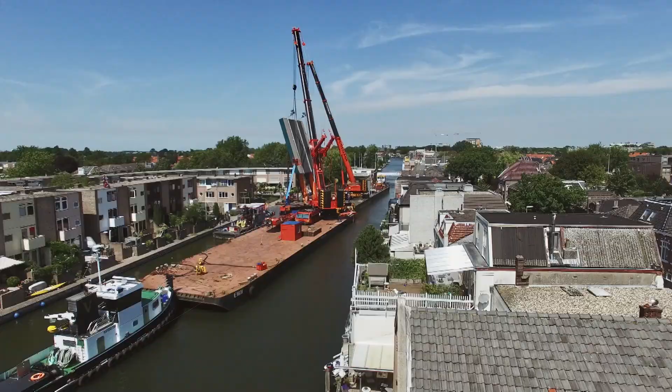In the Netherlands, a construction crane calamity. I heard metal to metal. It was definitely shocking. A potentially fatal flaw strikes an iconic San Francisco bridge. If any one structural component fails, the entire bridge can go down.

In Louisiana, mystery as a massive whirlpool drains a lake. It's the site of one of the greatest engineering catastrophes in this country. And tragedy strikes a Florida beachside condo. I was coming out and saw the condominium physically collapse right in front of me.

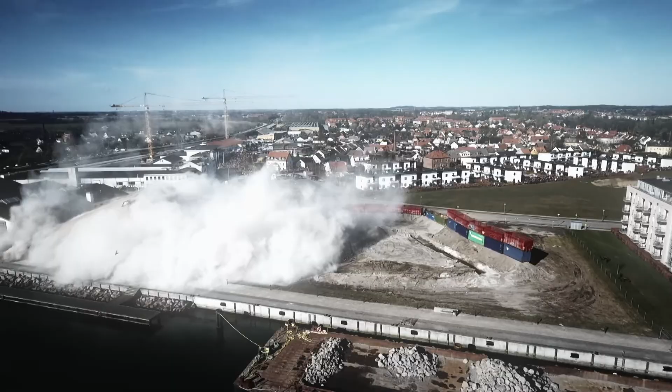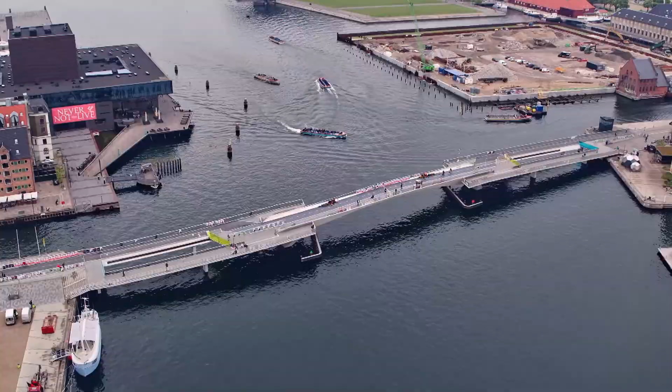With big builds, even the smallest mistake can be a huge disaster. From miscalculations to misunderstandings. Some with deadly consequences. These catastrophes are every engineer's worst nightmare. One basic rule of construction is to check and double-check your figures. Because when engineers miscalculate, the results can be catastrophic.

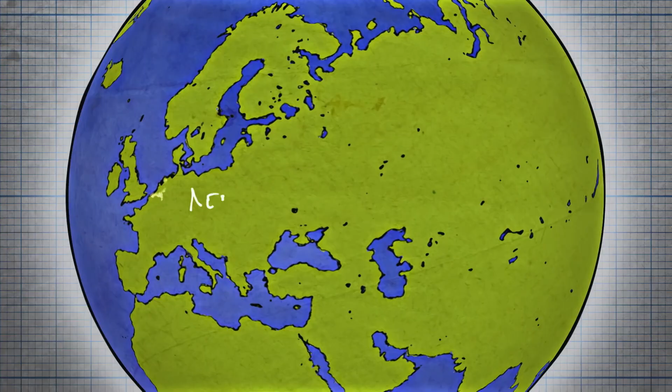Like this bridge project in the Netherlands that nearly crippled a town. With this job, small mistakes led to a major catastrophe, as a complex crane operation went drastically wrong. I was, of course, very fearful. It was difficult to understand what did I see. Every engineering student should look closely at this case. What went wrong here could so easily have been avoided.

The low-lying Netherlands are home to nearly 10,000 kilometers of rivers and canals, forming the densest network of inland waterways in Europe. The town of Alphen aan den Rijn lies at its heart. As local journalist Vera Vergunst explains. The waterways here in Holland are very important to connect the whole country. So this one is the only one you can go from north to south, and it's used by cargo ships, sailing boats, pleasure boats, and the biggest yachts.

With so many waterways, bridges are a way of life. So this bridge, the Queen Juliana Bridge, is the most important bridge in Alphen because it connects that side of the city to the other side, and it's the only bridge in the center you can pass by car. It's not just about city traffic. Without this bridge, cargo and large pleasure boats wouldn't be able to take the scenic shortcut that this river offers. About 20 times a day, traffic grinds to a halt as the Queen Juliana Bridge opens to allow larger vessels to pass through town.

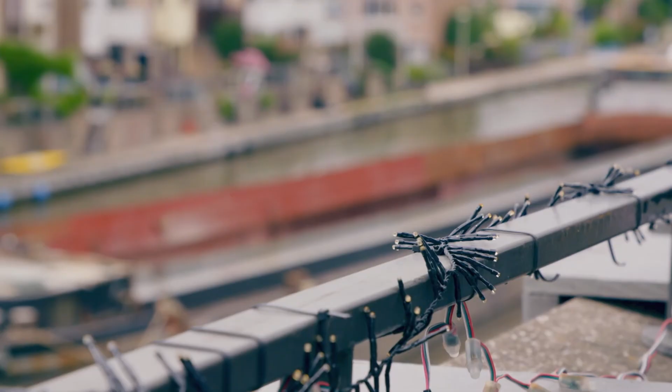Back in 2010, the constant use had taken its toll on the steel, and the decision was made to replace the lifting span. Now, this meant entire sections of the bridge would need to be lifted by crane and carried to the riverbank. The challenge was how to get the cranes close enough to the bridge. With the banks cluttered with businesses and homes, engineers decided the best option was to work from the water.

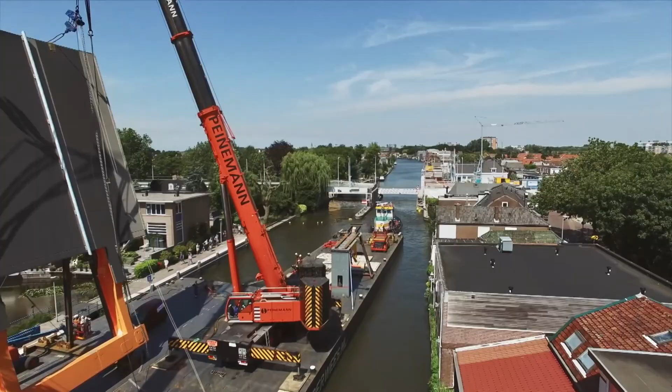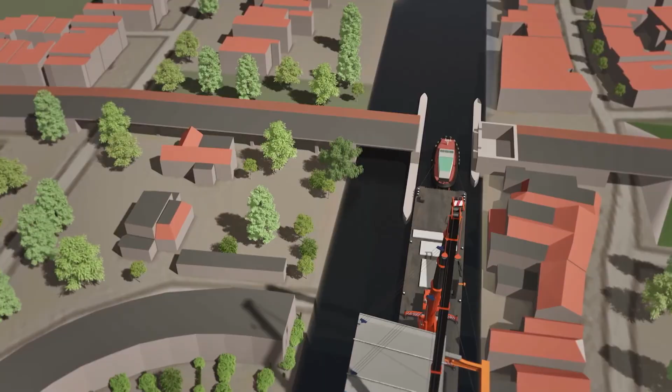Amateur photographer and drone operator Dick van Smieren filmed the project from his canal-side balcony. It was very spectacular to see in this area the pontoons with the big cranes on it. It was high, it was impressive. The plan involved two massive cranes, one 700 tons, the other 400 tons, each mounted on a barge. This tandem lift would see the bridge deck lifted from a third barge. And once horizontal, slung between the cranes, the two barges would sail 100 meters to fit the bridge into the existing mounts.

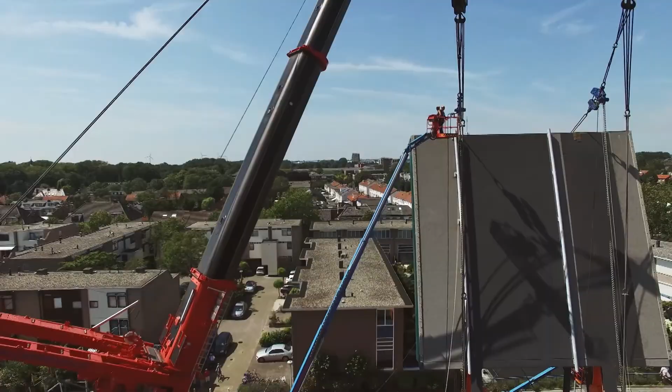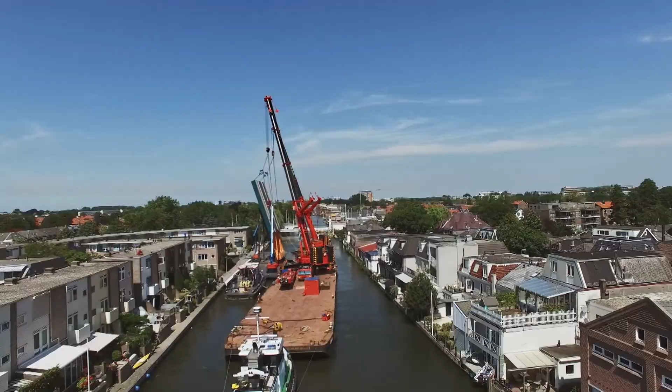I think a lot of people thought it was a pretty crazy idea to put cranes on pontoons, but I think here in Holland the engineers are very innovative, and we trust them. So we were like, well, this will be okay. Since I love filming and photographing, I took the drone and it showed, of course, the impressive perspective of the huge cranes and how those cranes were ready to pull the bridge and take it to its new place.

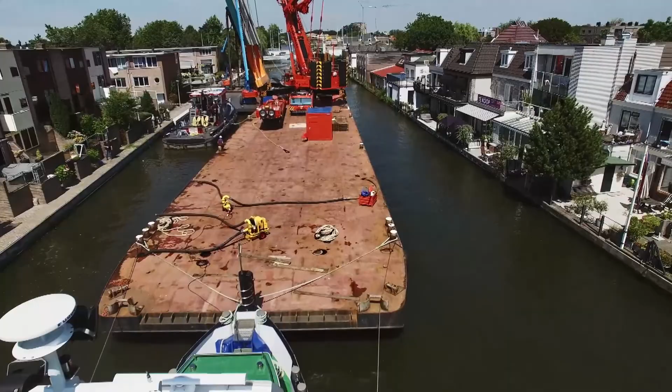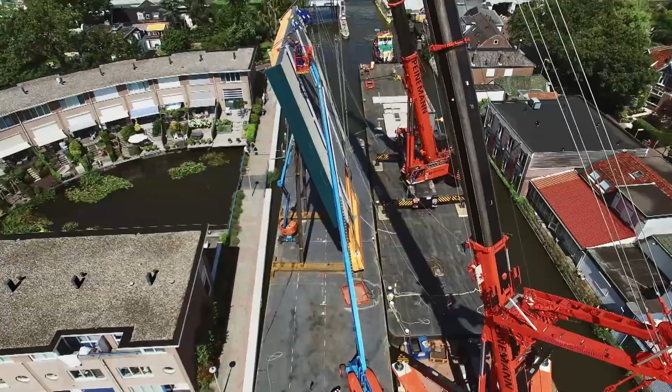August the 3rd, 2015, lifting day. The town looked on as the cranes took the strain. Actually, that day it looked normal, so impressive to see it. At first, the crane stood perfectly balanced, almost as if frozen. But once the lift started, the picture changed dramatically. But the first thing where it really was strange was when I heard metal to metal. You would not expect that in so careful an operation. And then you could really see the bridge moving, touching the crane.

It was definitely shocking. You see that collapse. Of course, you think there are victims. The first thing I did was calling an ambulance. Footage from a security camera reveals just how dangerous the situation was.

Four houses on the water collapsed, and the two other houses on the other side of the street also collapsed because the crane was so big. It destroyed all of the houses, and a lot of other houses were damaged by the accidents. For the authorities, getting into the houses which the cranes had crashed onto was the priority. Incredibly, despite 20 people being injured, no one was killed.

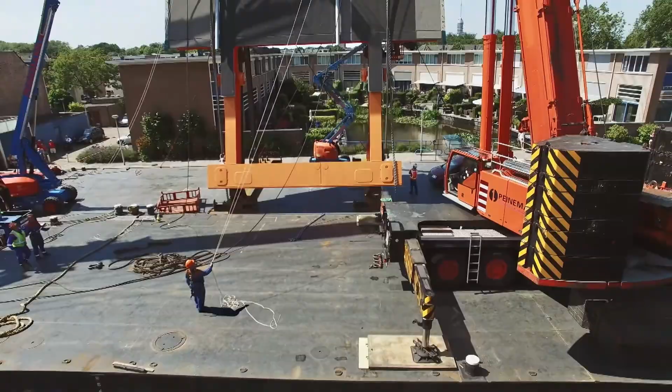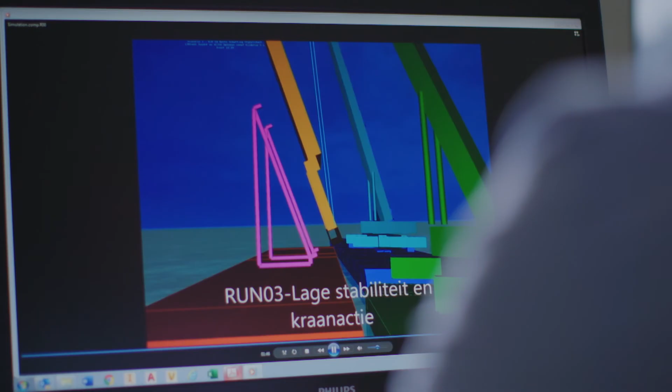We started with the data from the lifting plan. After that, we checked the condition at site was exactly as what they had planned. The key problem was in the balance calculations for the delicate and highly complex lift operation. The preparation, it's quite a lot of engineering to be done, especially in this case with two barges, or actually three barges, and one barge with a load as well. Two cranes, wind, current, maybe even waves. So it's really complex, so you have to do really proper engineering in advance to determine if it's feasible or not.

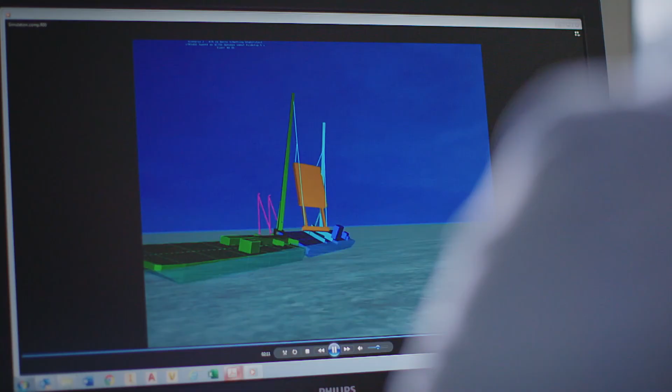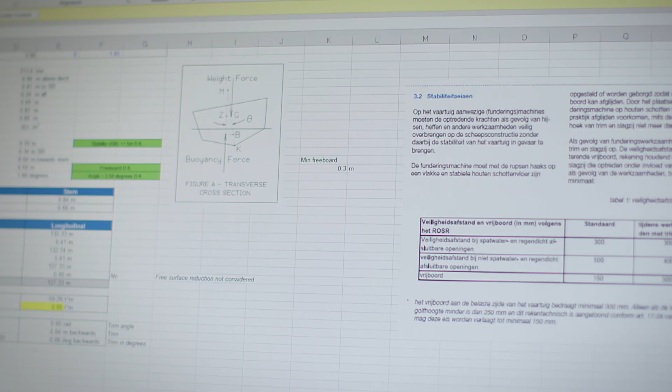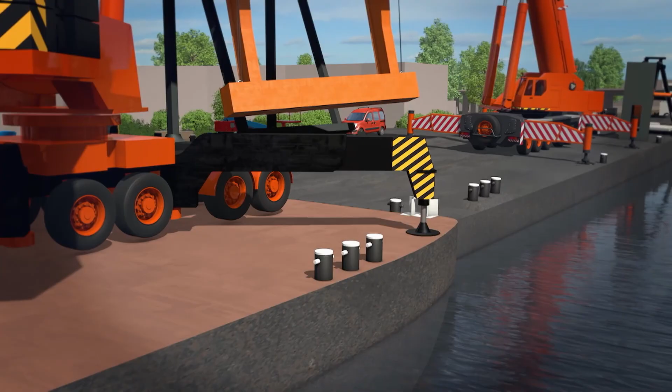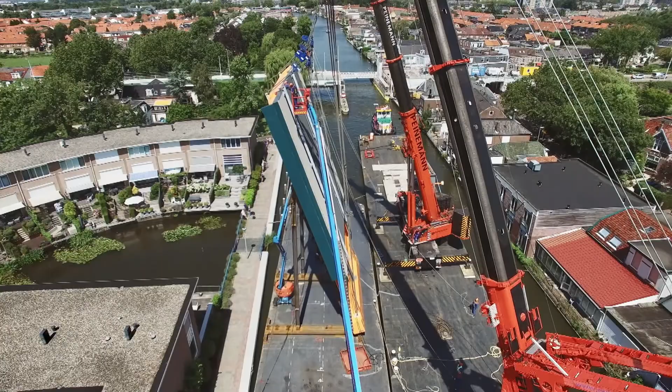Major discrepancies between the theory and reality quickly emerged, based on miscalculations of the rig's stability. Especially on the small barge, there was a lot of additional equipment and material. Also, the ballast condition of the barge was not according to the plan, and all these changes reduce the stability. The inherent instability of the barge with the smaller crane caused it to list to one side. The excessive sideways forces buckled the crane's mast, which toppled, pulling the bridge deck and the larger crane with it. They have done some preliminary checks in the beginning of the project, but during the engineering, a lot of small things have changed. Small errors or changes in the engineering can lead to major accidents.

Leaving the town without its only vehicle crossing wasn't an option. So the authorities planned a second lift operation. This time, nothing could go wrong. For the second attempt, a bespoke floating crane was used. It's an expensive option, but one which hugely reduced the risk of a disaster. The bridge was finally operational nearly a year late and thousands of euros over budget. But for residents, the reopening was a huge relief. The town was, I think, very happy when the bridge was finally reopened, because it was really missing in the city center.

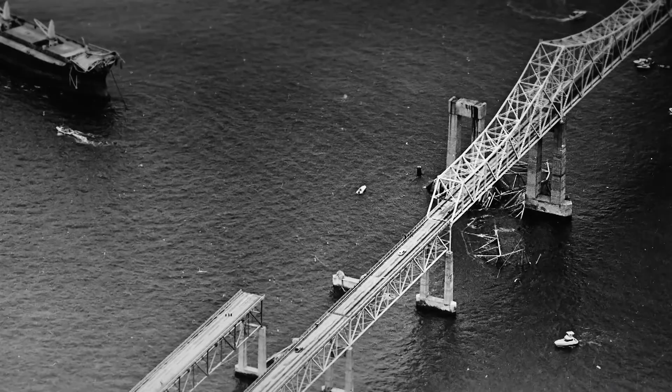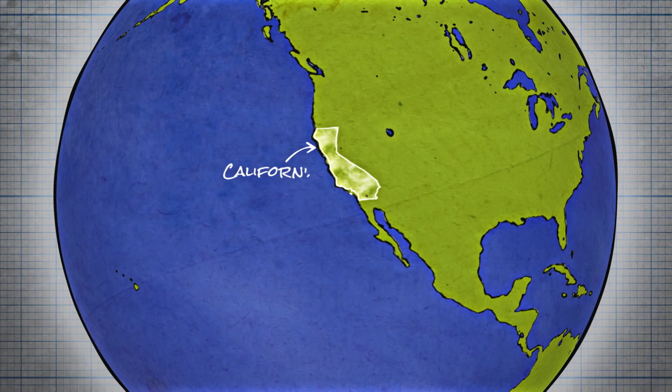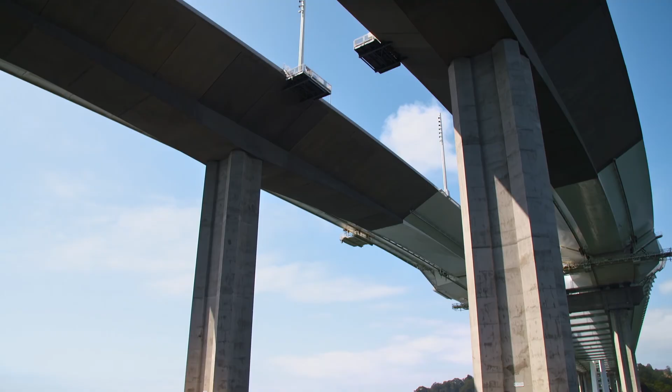When engineers push boundaries, sometimes the danger comes from the outside. But other times, even the mightiest of structures can be threatened from the inside. Like this construction calamity in California, with an engineering marvel that came dangerously close to catastrophe. One of America's most iconic bridges could have been one snap away from collapse. A cutting-edge design that could have turned into an epic engineering disaster. The design defect could have brought the whole thing crashing down.

San Francisco is home to some of the West Coast's most iconic postcard views. I love San Francisco. It looks stunning, it has culture, amazing architecture, and of course, an endless, beautiful waterfront. In fact, the city is surrounded on 3 sides by water. All this water means one thing: bridges. The Golden Gate is the city's most famous bridge. But there's another here that's a far greater feat of engineering. The San Francisco-Oakland Bay Bridge, better known simply as the Bay Bridge.

It's the city's most important crossing, as engineer Andrew Fremier explains. The San Francisco-Oakland Bay Bridge by itself is the biggest workhorse of all of the 8 crossings that are in the San Francisco Bay Area. And so on an average day, hundreds of thousands of people commute across that bridge. And it's very important for the community and for the economy for that bridge to stay open and operational. When it was built in the 1930s, the Bay Bridge was the longest and most expensive bridge in the world. But in 2013, a radical, unique middle section opened. Although just a fraction of the length, it alone was California's most expensive public works project ever.

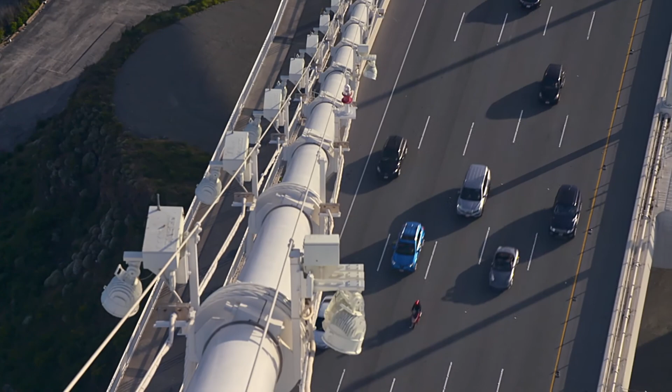Unlike a conventional suspension bridge, which has 2 cables anchoring it to each side of the crossing, a self-anchored suspension bridge is entirely supported by a single cable. Here, it forms an open-ended figure of 8, supported by the single 160-meter tower.

One of the most challenging parts of this entire bridge is the cabling system of the self-anchored suspension bridge. The anchorage is on the east end. It comes up the top of the tower, continuously goes around, wraps around, comes back up to the top of the tower, and then comes back to the other side of the east anchorage. The entire length is over a mile, so it's a long cable.

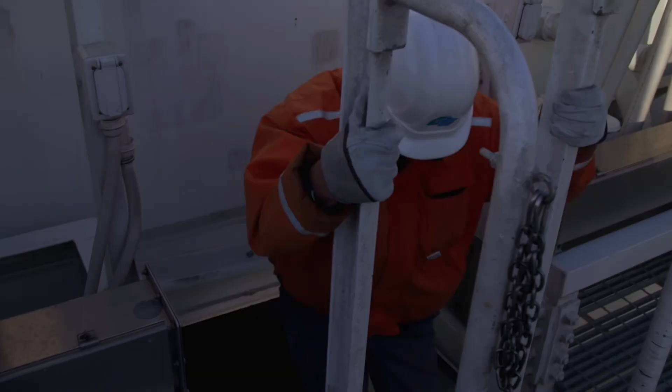The cable consists of 17,000 individual wires bundled together and anchored at the Oakland end of the bridge. We're here at the east end of the self-anchored suspension bridge, deep within, inside the superstructure. This is the splay chamber. This is basically where all of the cables come down and anchor.

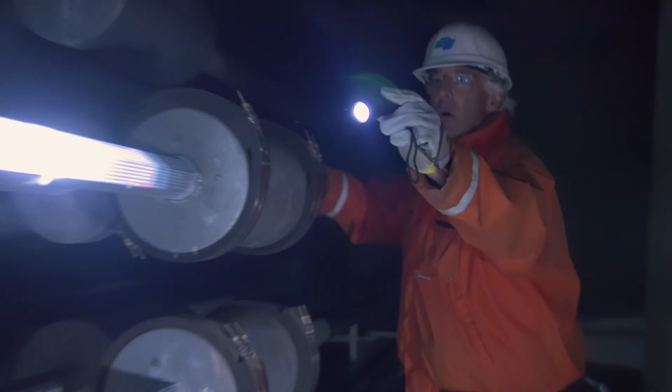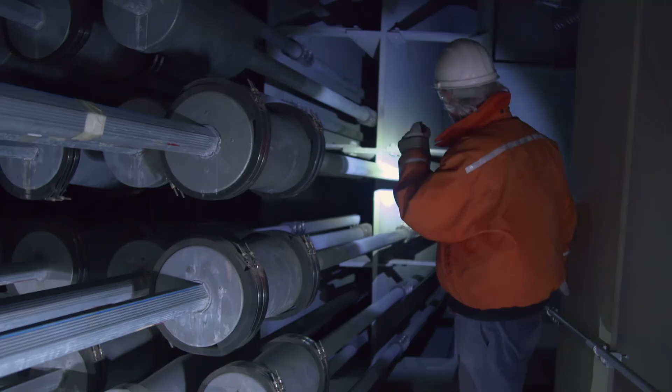So the parallel wire strands, even though it's approximately about a meter diameter main cable up on the bridge, they splay out here in the splay chamber, and you see all these parallel wire strands, and they splay out into smaller groups of wires. They get cast into what we call a socket. Then the socket is screwed into a rod, and the rod goes all the way back against an anchorage. That's a heavily, heavily reinforced steel wall, and it's screwed in tight.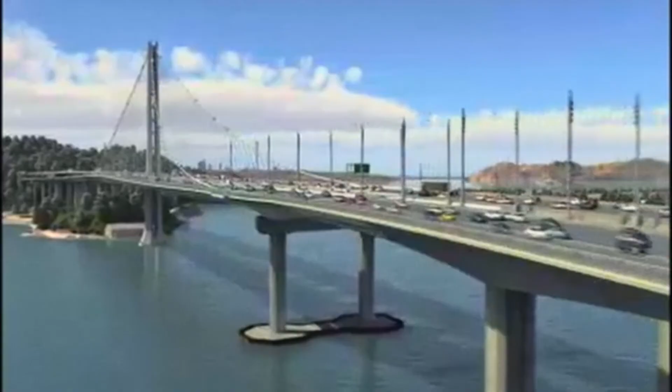This unique bridge wasn't just built to break records. The radical design is to combat something San Francisco is famous for: earthquakes. Journalist Charles Piller explains. We live in one of the most earthquake-prone environments in the world. There's two major earthquake faults that are adjacent to the Bay Bridge and affect the Bay Area more generally: the Hayward Fault, which is just in the East Bay Hills, and the San Andreas Fault, which is closer to the coast. Both of these are faults that have had major earthquakes in the past, and in particular, the Hayward Fault is thought to be likely to have a major earthquake, possibly quite soon.

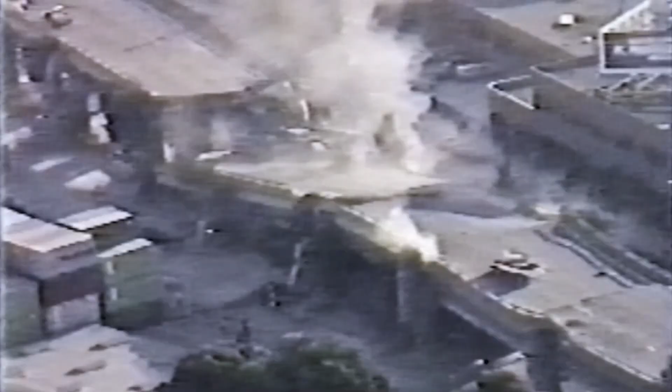In 1989, the San Andreas Fault triggered the massive Loma Prieta earthquake, and a section of the Old Bay Bridge slid from its supports. Engineers realized the entire section was vulnerable because it was built on soft mud. So, when the new span was built, the solution was to have a single tower standing on the only solid rock in the area. This self-anchoring method means the cables are attached to the end of the deck rather than the ground, which means the structure has much more flexibility in an earthquake.

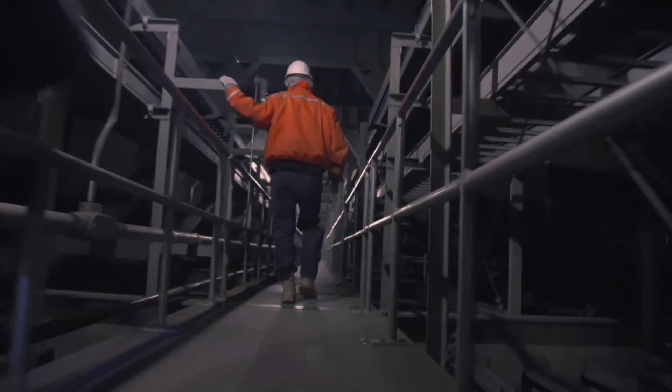The self-anchoring section of the Bay Bridge was built to survive an 8.5 magnitude earthquake. But something significantly smaller almost sent it crashing into the bay. In the 1989 earthquake, the section of road deck that collapsed had been shaken from its supports. To prevent that from happening with the new bridge, the decks are joined to the legs using connections called shear keys. Engineer Brian Maroney explains. Shear keys are devices that hold on either side of the bearing to keep the superstructure from sliding.

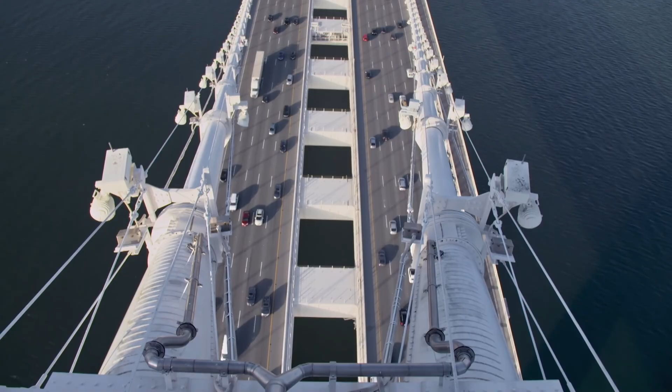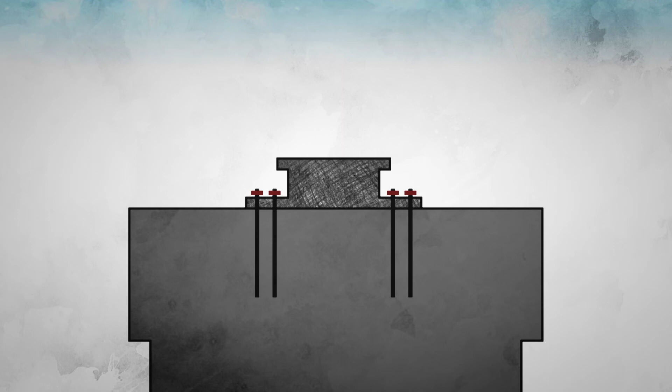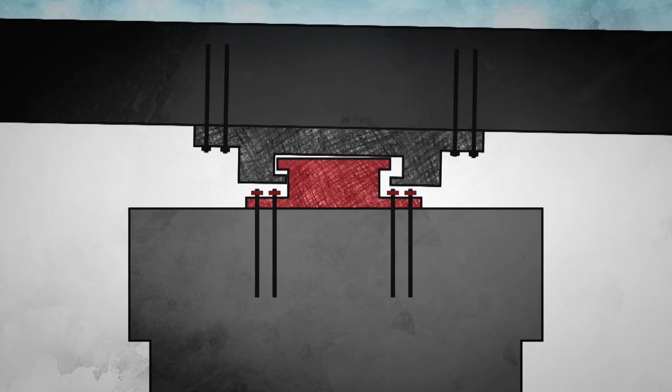The Bay Bridge shear keys have two parts: a 3-meter square base bolted to the eastern pier by steel rods over 7 centimeters wide. This links to a second plate on the road deck above, allowing movement much like a trailer ball hitch. As well as coping with everyday loads, if an earthquake hits, the design allows the two parts to shake independently without causing damage.

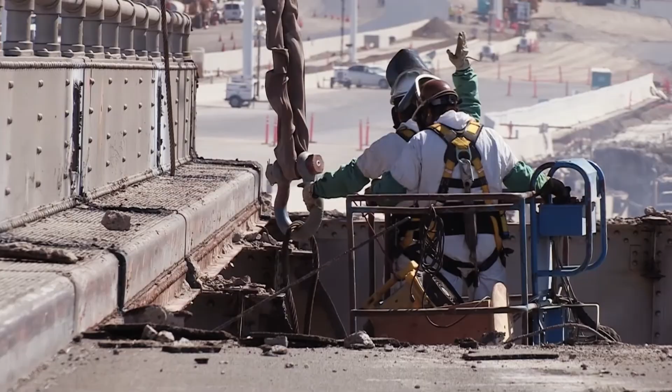Although engineers didn't know it, long before the bridge was complete, trouble was brewing in these crucial connections. The shear key rods were concreted in place in 2008, but the giant nuts couldn't be fully tightened until the bridge above was constructed too. This was a massive project, so the bolts sat there untightened for 5 years. And when the nuts were finally tightened, 32 of the steel anchor rods fractured immediately. This massive fail left the bridge vulnerable. Had an earthquake hit, the very elements designed to protect it could have led to its ultimate destruction.

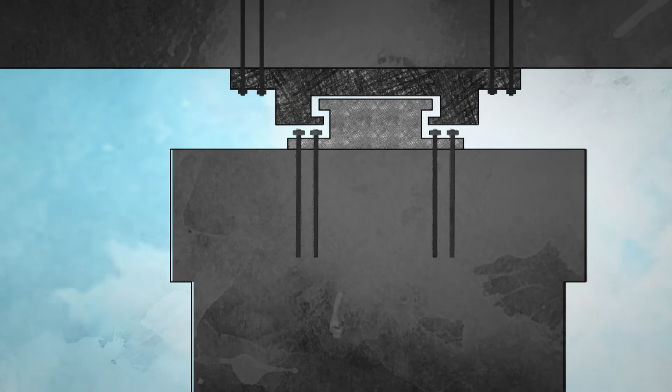Metallurgical engineer Lisa Fulton investigated this potentially catastrophic problem. This bridge is what is known as a fracture-critical bridge, which means that any one structural component, if one fails, the entire bridge can go down. Despite the structure's super size, the failure was caused by a microscopic problem known as hydrogen embrittlement. It's a type of corrosion where hydrogen atoms diffuse into a metal structure. As the atoms slowly recombine into hydrogen molecules, they form a gas that creates pressure inside the metal.

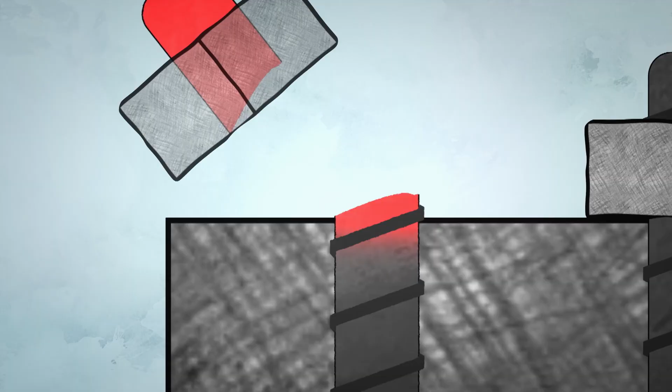Ultimately, the rods become brittle. Hydrogen enters the steel and has an embrittling effect on the steel. So embrittlement is when something breaks without absorbing a lot of energy. Even under very little pressure, hydrogen embrittlement can make steel snap. With a massive force, like the shaking of an earthquake, any brittle steel would be a serious risk.

With the discovery that the shear key rods had failed, people were obviously worried that other steel bolts and even the main cables themselves might be at risk. This bridge is an amazingly unique creature. The question is whether this self-anchored span, this unique design that is replicated at this scale nowhere in the world, whether it can withstand the strongest level of quake that could occur on the Hayward or San Andreas Fault.

And Caltrans says yes. We've done our computer modeling and we feel confident of it. Of course, on the other side are many engineers who doubt it and who question it. If the officials say the bridge is safe, you just have to trust them. But had the main cable been vulnerable, with this type of bridge, it couldn't be replaced. There would have been no choice but to tear the whole thing down and start over. This is the cable that holds up the suspension span. It's crucial that there not be any corrosion on it.

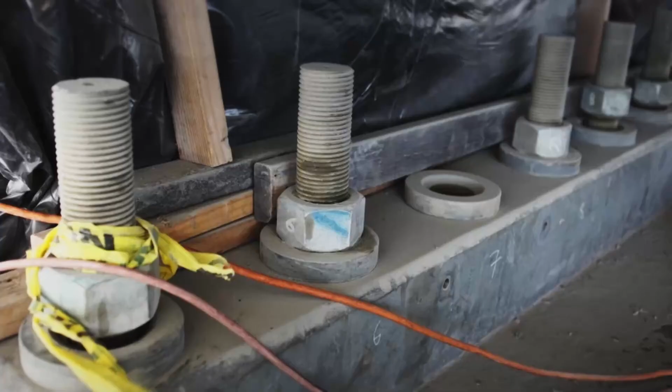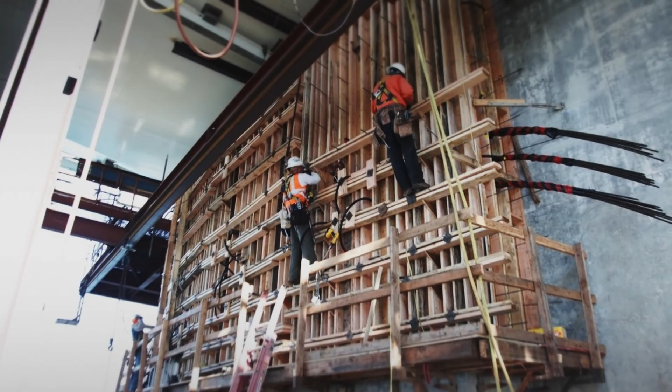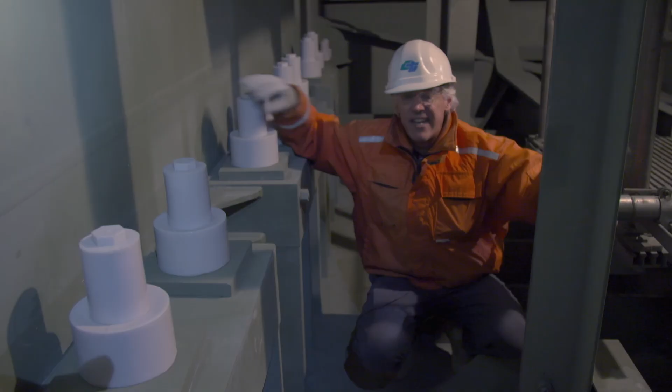What was not in doubt was that 32 of the shear key rods had fractured. If a quake hit, no one could be sure what would happen to the other rods, and engineers didn't want to find out. The rods couldn't be replaced, so they worked round the clock on an alternative solution to hold the shear key in place. What we did is we created a saddle, just like a saddle that you put on the back of a horse, and then we strapped or pulled down, cinched down that steel saddle, and then pre-stressed it and tightened it.

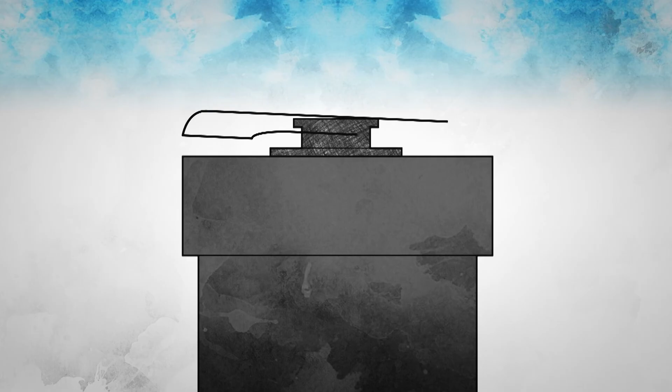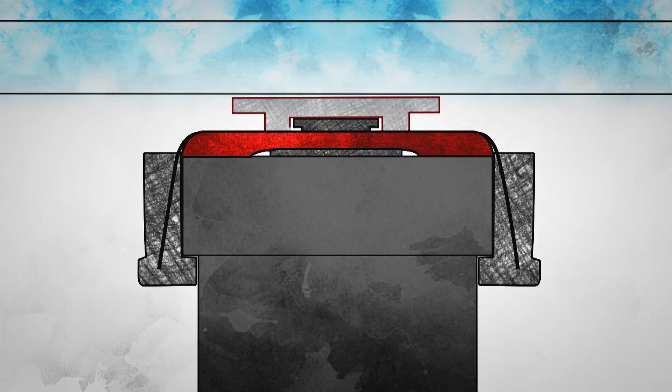A pair of steel clamps called saddles were fitted over the sides of the shear key, with multiple steel rods and cables holding them in place, effectively strapping the shear key to the bridge leg. Whatever happens to the rods, the shear key isn't going anywhere.

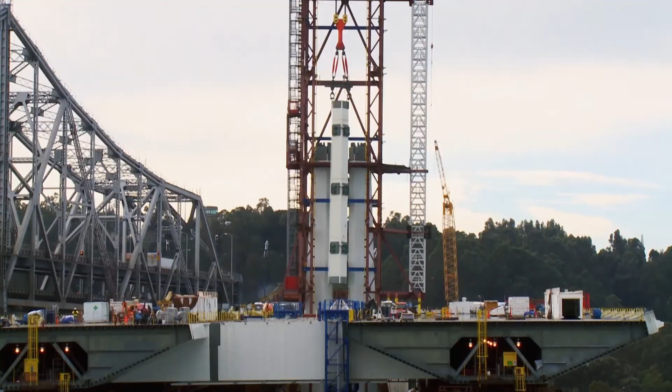Finally, in 2013, the revolutionary new eastern span of the San Francisco-Oakland Bay Bridge opened to traffic. It was 10 years behind schedule and billions of dollars over budget, but San Francisco had added another striking bridge to its collection. This ended up being the most expensive bridge ever built in America, but it could have been one of their costliest construction catastrophes.

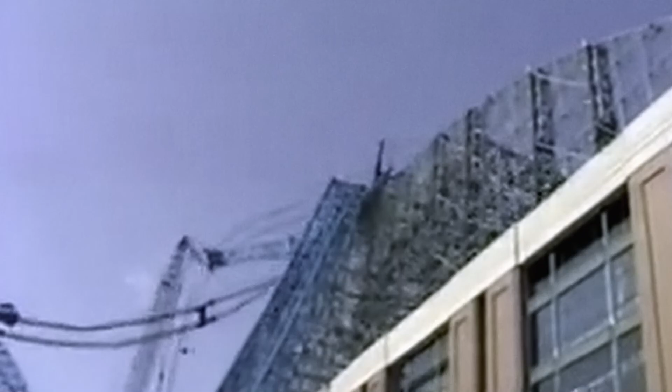When engineering goes wrong, the cause of the calamity can be huge and obvious for all to see. But sometimes the simplest mistakes can have devastating consequences. Like this mystery in Louisiana and a massive lake that vanished. A tiny miscalculation changed the entire landscape forever. Once this epic engineering fail started, there was no stopping it. This catastrophe quickly spiraled out of control. It's the site of one of the greatest engineering catastrophes in this country.

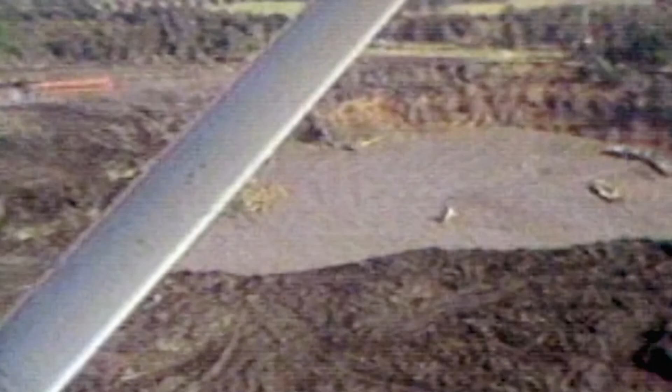Louisiana, home to the Big Easy and endless bayous, where the mighty Mississippi River meets the ocean. When I think of Louisiana, I think of swamps and lots of water. There's the long coast beside the Gulf of Mexico. It has vast bayous threading through the Mississippi Delta and endless lakes in between. For thousands of years, the river has dumped layer upon layer of sediment to create a vast flat landscape.

Geologist Tim Dukes has been studying the ground here for decades. We're located in what is called the Gulf Coast area, the coastal plain, generally pretty flat. Although the state is mainly flat, geologists like Tim have found the occasional mound that hints at something precious lurking beneath the surface. These places are irregularities in that because they're salt domes and topographically higher, significantly higher. There are literally hundreds of these salt domes that are found in Louisiana and thousands that are found in the Gulf Coast. Around the edges of these, there are a lot of areas where drilling for oil and gas can take place, and it's been pretty prolific.

Oil and gas have a dirty reputation, but they're both completely natural. Basically, the remains of billions of tiny plant and animal plankton that have been pressure cooked deep beneath the surface. The resulting stew is oil and gas. Because of the way they were formed under the ocean, oil, gas, and ancient beds of sea salt are often found together. Over millions of years, salt forces its way up from deep in the Earth's crust towards the surface and forms salt domes. These domes create natural underground pockets that trap the oil and gas that formed below them.

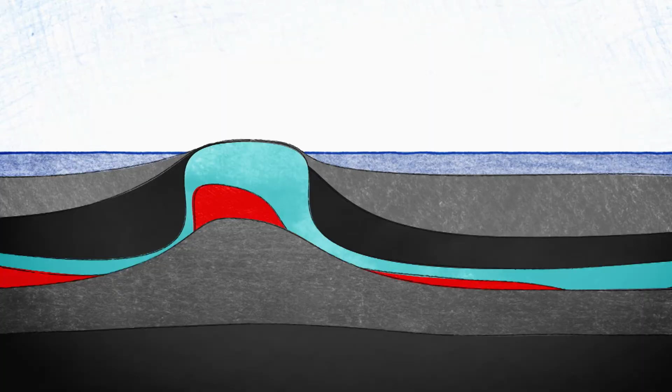In the 1970s, prospectors were drawn to a salt dome on the western edge of the Mississippi Delta, the so-called Jefferson Island, on the banks of Lake Peigneur. Tim was here in 1980 when engineers were searching for oil. We're located on the shores of Lake Peigneur. There was a drilling rig that was located out more or less in the center of the lake, and they were drilling supposedly around the edges of this salt dome.

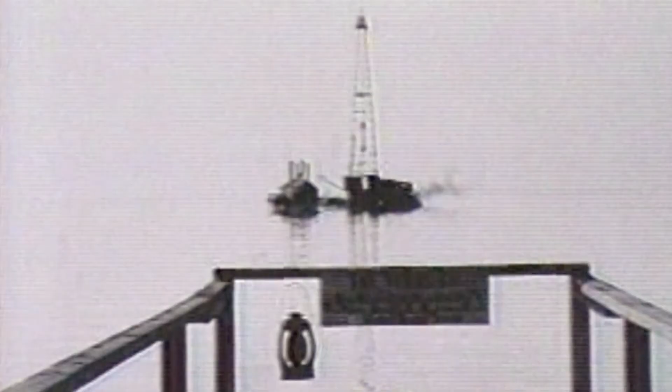Michael Richards Sr. was working on Jefferson Island at the time. When I came to work here in 1969, we used to mow grass between here and the pilings. There was a grove of pine trees right here. On November the 20th, 1980, as the rig drilled into the lakebed, the drill jammed solid, and Michael grabbed his film camera.

Soon after the drill bit became stuck, the whole rig started to tilt. The rig workers knew that something was seriously wrong and evacuated the rig. After they reached the shore, it soon became clear they'd had a lucky escape. The rig quickly disappeared through the lakebed, and a giant whirlpool formed where it had stood just minutes earlier.

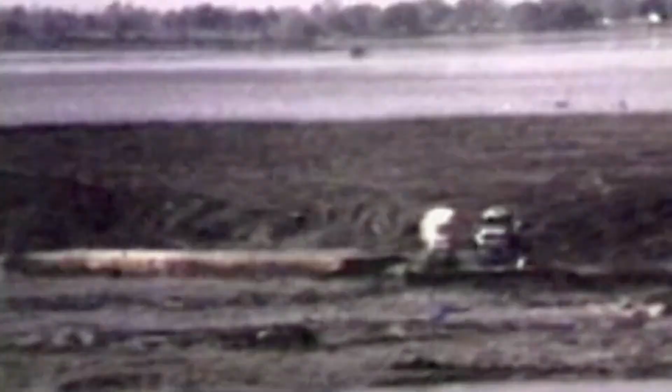Once a whirlpool had formed, the spinning water rapidly eroded a hole in the bottom of the lake. Although small, it was big enough to suck in the whole lake. Michael continued to film. We were standing on the porch on the second floor of this house that you see here that's sunk about 30 feet, looking down on the lake and watching the barges rolling around, a tremendous vortex. And then at one time there were 3 different vortices, each one turning and swirling.

The lake was rapidly being sucked underground, but the force of the whirlpool soon started dragging more than just the water within. In addition to the water, about 65 acres of Jefferson Island also disappeared through the lakebed. The land in the bottom of the lake was peeling off in great layers like a cake. And behind us, the water was liquefying the soil. And in that direction where there were trees, the roots of the trees were holding the soil. So the soil slipped and the trees laid down. You can still see the tops of some of those trees today.

Michael discovered that filming on location could prove deadly. Sheriff's Department came in and told us it's time to go. So we left. And not long after that, the house and all this land slipped in. The progress started moving in this direction. With Lake Peigneur no longer a lake and a huge part of Jefferson Island missing, everyone was left asking, where on earth had it all gone?

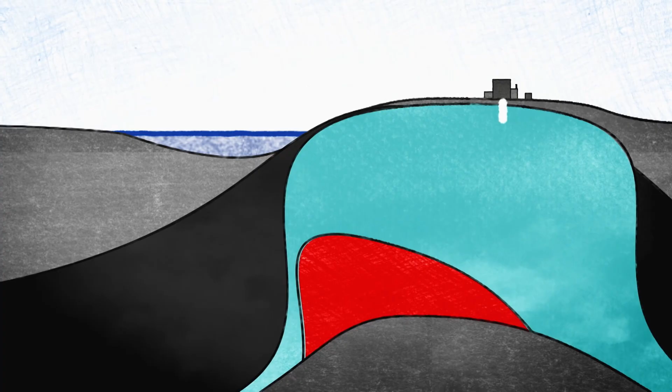Jefferson Island was the surface evidence of a salt dome, which is why rig workers were looking for oil trapped beneath the salt. But as they knew all along, there was also a massive salt mine being excavated beneath the island. In fact, it was about the size of a skyscraper. The salt mine was at considerable depth, several hundreds of feet. I think the deepest level was down to 900 feet, and it was an active mine at the time. They were pulling out salt. This is an example of what they were after.

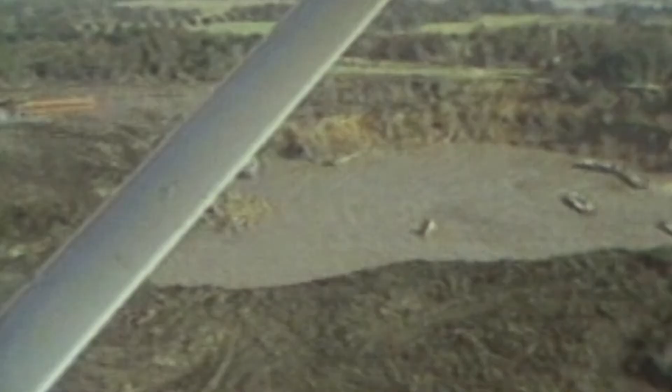It turns out that instead of discovering oil, the rig had inadvertently drilled through the roof of the salt mine. Because of the safety conditions that were present and the procedures that they had established, all of the miners were able to get out without anybody being injured or killed. This explained where all the water had gone, but not why the rig had drilled into the salt mine in the first place. After all, it had been known about for 60 years.

According to geoengineer David Wilshaw, it was all because of a very simple but catastrophic mistake. What happened is basically they got their calculations wrong about where to put the drill rig and where to drill the oil exploration well. They were out by a few hundred feet. So they never anticipated drilling into the salt. They were looking for the oil and gas deposits that sit around the salt dome.

When deciding where to drill, the engineers used a method called triangulation. Basically, angles from two or more fixed points are used to locate another point. The problem was they made a mistake in their calculations and drilled in the wrong place. That small error might have made the difference between finding oil and this massive disaster. Thanks to modern technology, it's a mistake that would be unlikely to happen ever again.

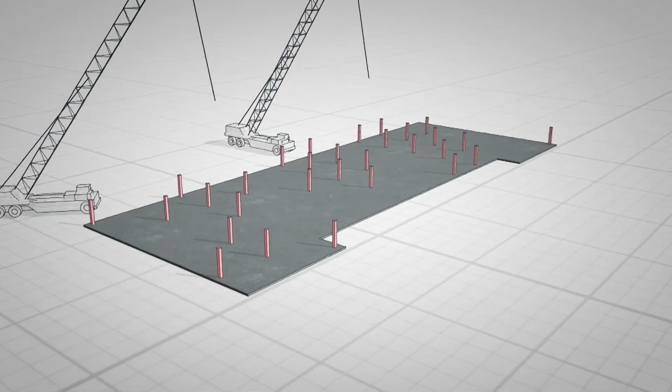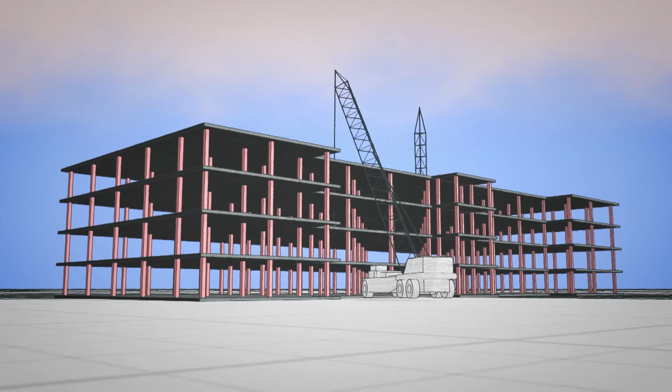We are headed to the site where the original Harbour Cay condo was supposed to be built. This would have been a prime piece of real estate to put a 5-story condo on. What we have here is an example of what the Harbour Cay could have looked like. So this building is typical of the area. It's a condo that's 5 stories high. Each level would be made up of large flat slabs, held up by columns. To maximize internal space, there would be no additional horizontal beams. The slabs would be strong enough to support themselves.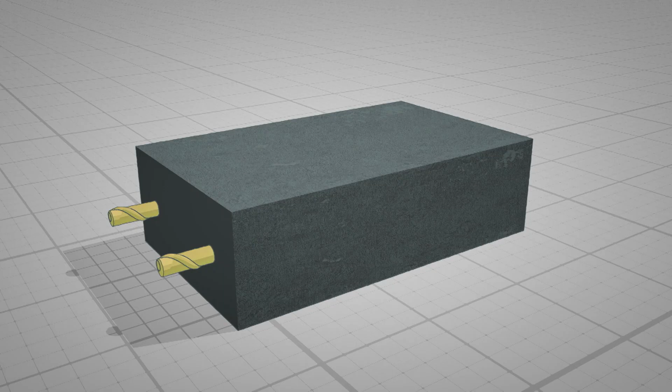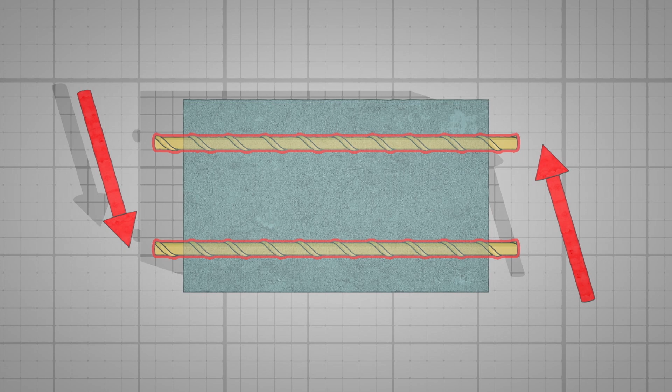Concrete is great for construction. It's very strong as a supporting block, but when it's used as a floor or roof panel, it has to be self-supporting. That calls for serious reinforcement. Setting steel bars inside concrete is key to structural strength. The concrete resists squeezing or compression, while the steel resists bending or tension. But to work properly, the exact height of the bars is critical. With Harbour Cay, the plan was to use a process called reinforcement chair design.

So what we have here is an example of what you would see on a typical construction site where the slab is being poured. And you would have these form boards, so it would make the mold of where the concrete's gonna go. The location of this bar is critical in the placement of the slab because all the calculations are based off of where this bar is. The idea with the chair system is to hold the rebar at exactly the right height. If those measurements are out by even a couple of inches or centimeters, the whole thing can come crashing down.

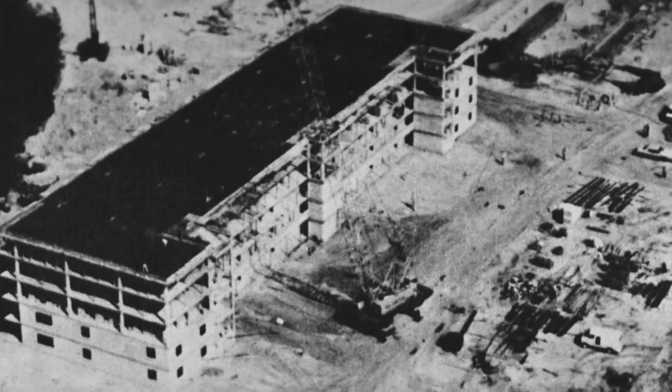3 months into the project, on March the 27th, 1981, the construction team was pouring concrete to create the roof 5 stories up. But shortly after 3 p.m., the build went drastically wrong. Kent Fay was 20 at the time, working as a lifeguard just across the street. On that day, I was leaving work to head over to have my paycheck cashed at the local bank. And as I was coming out, I saw the Harbour Cay condos that they were building actually physically collapse right in front of me. And you just saw a huge, huge ball of dust. The collapse happened so fast that there was no warning for workers.

I quickly ran over there. I got up on the scene. I was dealing with people that were severely, severely injured. There was a young man on the ground that was actually in shock. They went and got him up and had him help me start attending to people that were injured. Residents and construction workers rushed to the scene to join the rescue mission, quickly followed by airmen from the nearby Patrick Air Force Base.

23 workers were injured, but despite the rescuers' best efforts, tragically, 11 died. The disaster left the community reeling and demanding answers. The obvious question was why had the Harbour Cay condo collapsed without warning?

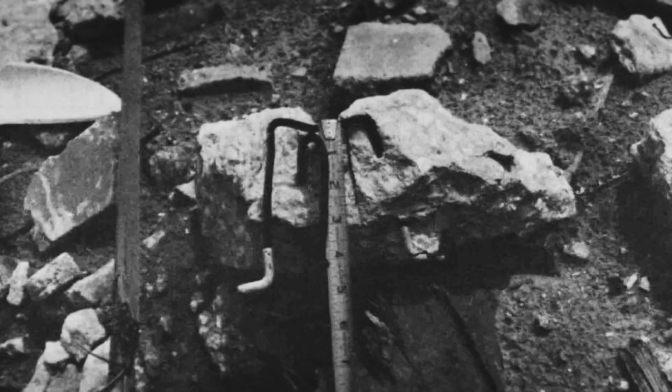Engineer Julie Keller explains. The reason that this is critical on this particular condo is that the steel not being in the right location was found to be because these chairs were not the right size. The chairs were not the right size because the engineer signed off on the shop drawings showing the chairs in

the incorrect size. And that led to the steel being under so much stress that every time you put another floor on it, there was additional stress on the condo. So it led to a brittle failure. Brittle failure is when concrete cracks suddenly and without warning.

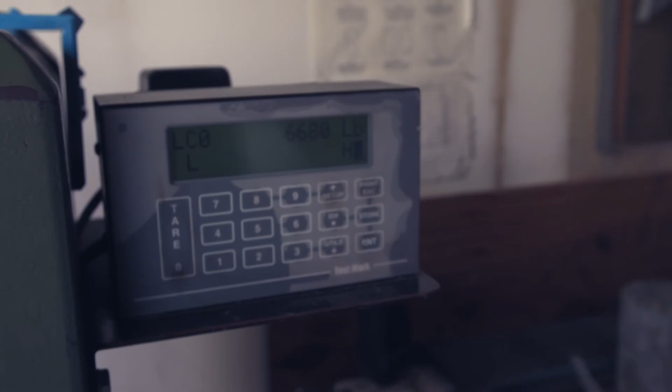As structural engineer R.N. Sailapan demonstrates. In this test, we are going to be determining the flexural strength, the bending strength of concrete. Right now, we have applied a load of over 5,500 pounds. Now it's way over 6,500. These concrete specimens are expected to break with a bending strength of about 500 or 600 psi.

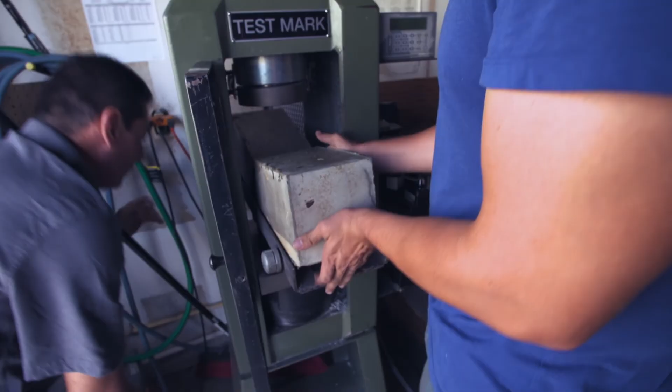As you can see, this beam was tested to failure. However, this is not how it is in the field. In the field, when we're actually constructing a building, you would have reinforcing steel in there, which greatly enhances its capacity.

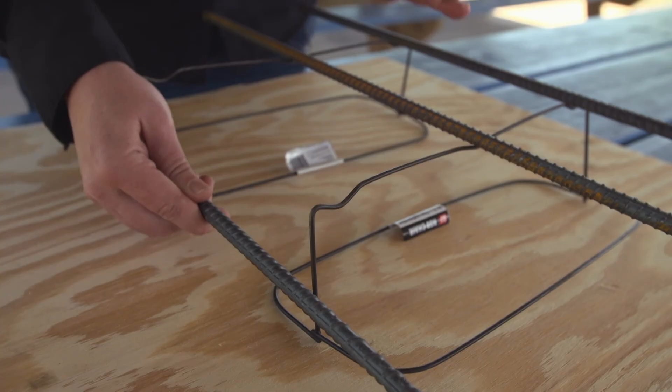But the brittle failure in the concrete wasn't just the result of the steel being positioned incorrectly. The original design didn't call for thick enough concrete in the first place. Even though this bar should have been down here, the slab was designed to be 8 inches thick. So that's what the engineer had done in design.

But the American Concrete Institute has a code which says that a flat slab supported on just columns should be 11 inches thick. So the distance between the compression and where this bar should have been, that critical number that was in the calculation, should have actually added 3 inches, not just the inch that was lost due to the chair size.

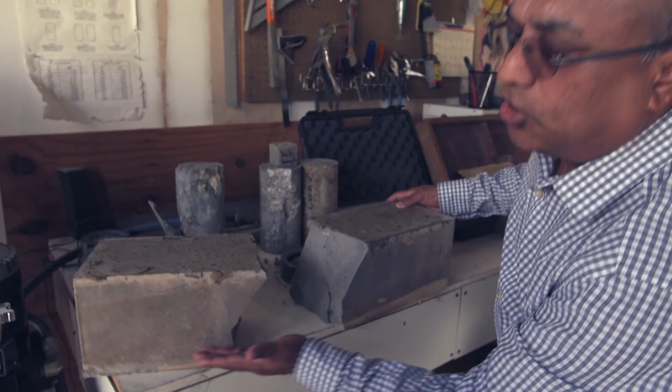Typically, in order to increase the bending capacity of beams and slabs, the steel is placed in the lower portion of the cross-section. But in Cocoa Beach, it was placed almost at the midpoint, which effectively does not contribute to increasing its bending capacity, because as you can imagine, when this beam bends this way, the bottom is in tension and the top is in compression.

Concrete works really well in compression. It does not work well in tension. A teacher a long time ago told me that if you join your hands together, you can see the example: if you push on your hands, you see your skin wrinkles on top, and that's compression.

So you can see that happening, and then you look under your hands and you can see the skin stretching, and that's tension. And that's where the cracking forms, and that's why this needs to be in the correct location in order to do its job. It seems that there were multiple miscalculations.

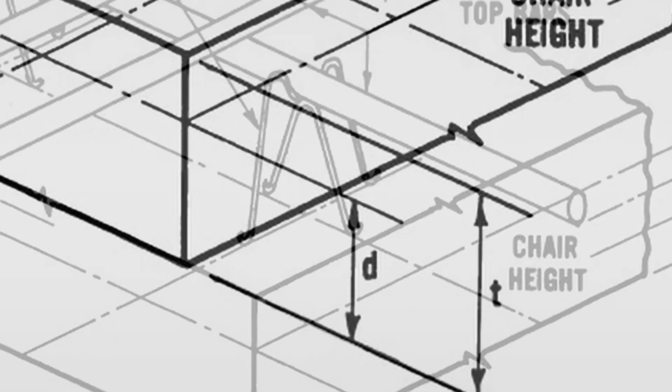The chair size was out, the thickness of the concrete was wrong, and the calculations in the original drawings were based on rebar that was 1/3 stronger than the steel used in construction. The calculations were wrong on every floor, so as each was being completed, the problem was being compounded. It was just getting worse and worse.

Ultimately, these factors combined as the 5th floor was being poured, leading to a failure known as punching shear. With the rebar set too high, the bottom of the panels were being overstressed. When the concrete failed, the panels fell, but in effect, it was the support columns punching through the concrete.

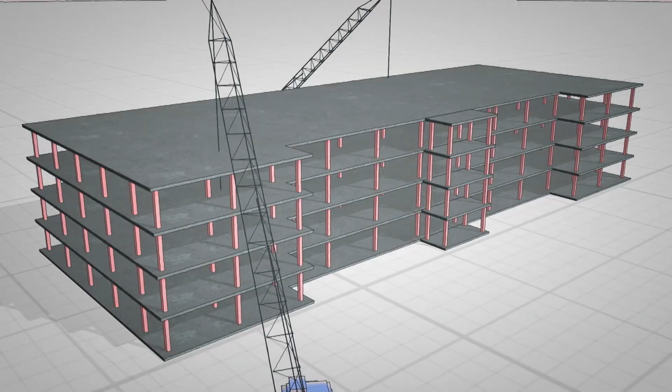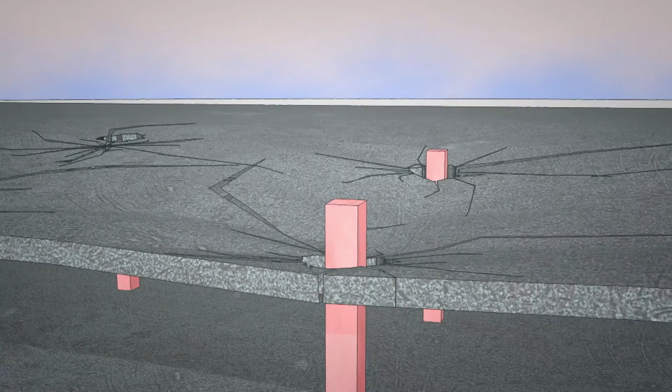This type of failure happens in reinforced concrete slab structures. Where the columns support the slabs, they're subjected to very high forces. In this case, the slabs failed at these crucial points, and with no support, the structure collapsed. They continued to build, and then when they put the 5th floor on there, it just failed suddenly.

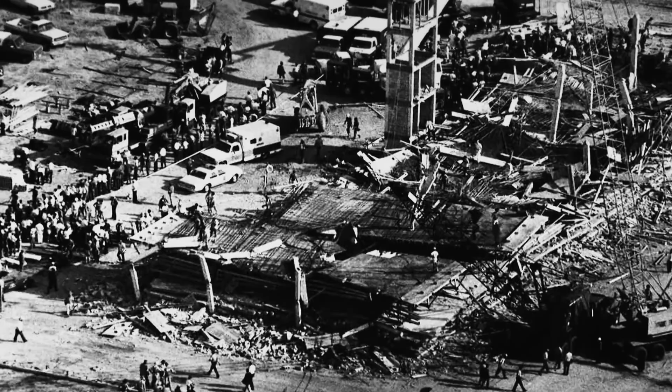There were mistakes at every stage, but by getting the numbers wrong at the design stage, this project was doomed from the start. Although it was too late for the workers who lost their lives, the Harbour Cay condo collapse led to more rigorous enforcement of engineering and construction codes in Florida and across the United States. It's critical that engineers learn from tragedies like this to help prevent anything like it from happening again.